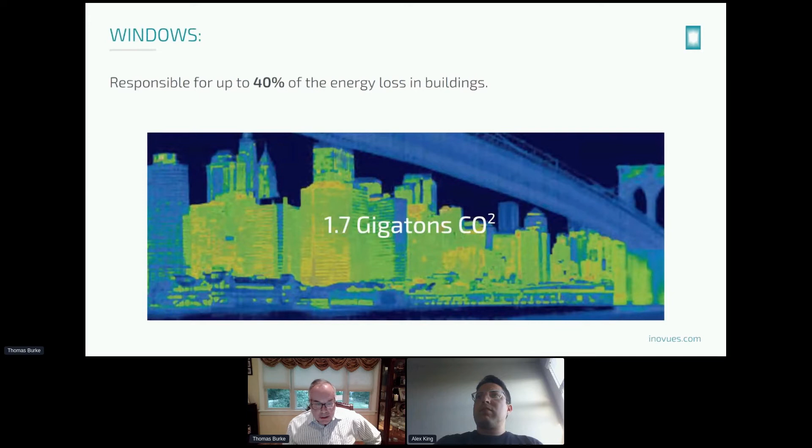Just a brief lesson regarding the size of the problem we're solving: windows are responsible for 40% of the energy loss in buildings. If we were to upgrade 7 billion square feet of windows, that would equate to 700 trillion BTUs of savings, roughly $260 billion in real dollars saved. That equates to 1.7 gigatons of CO2—that's really the size of Russia as a country, just to give you the size of the problem and our solution in the marketplace.

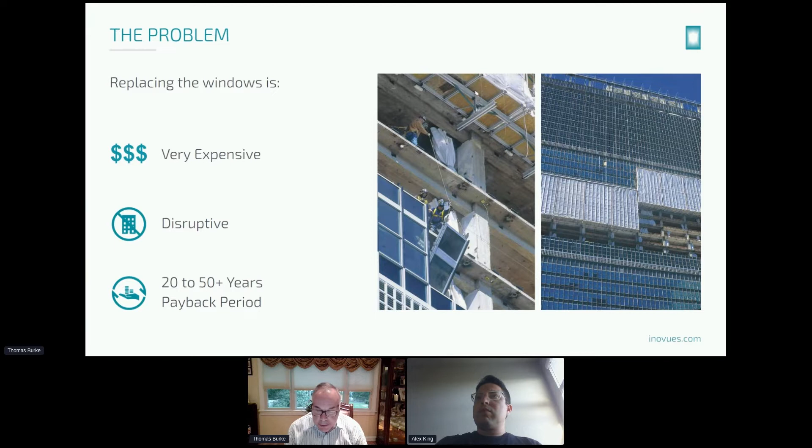So the problem—on the right-hand side you can see a picture of what a facade replacement would look like. This is why a lot of commercial building owners do not do full facade replacements: they're very disruptive, they're expensive, and you look at roughly 20 to 50 year payback periods. But I'd even say that's kind, because it's really almost a 99-year payback, since you're losing—in this case, this size building is probably losing what I'd call a buyout program, so probably 2 years' worth of rent, because they had to buy their tenants out of the building. So that's the problem in the marketplace with a full facade replacement.

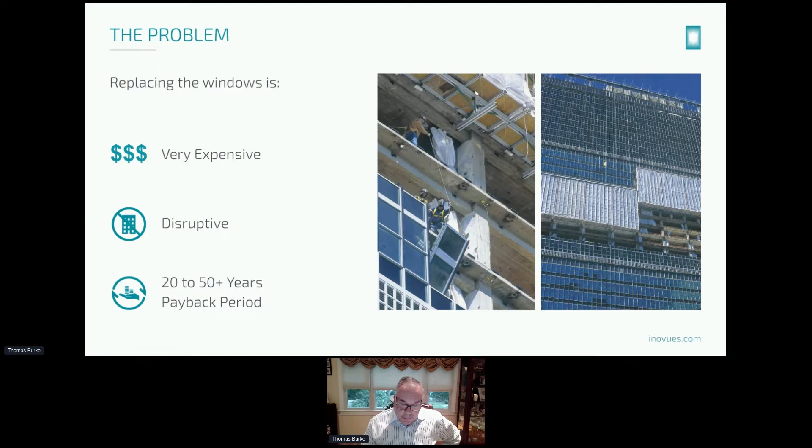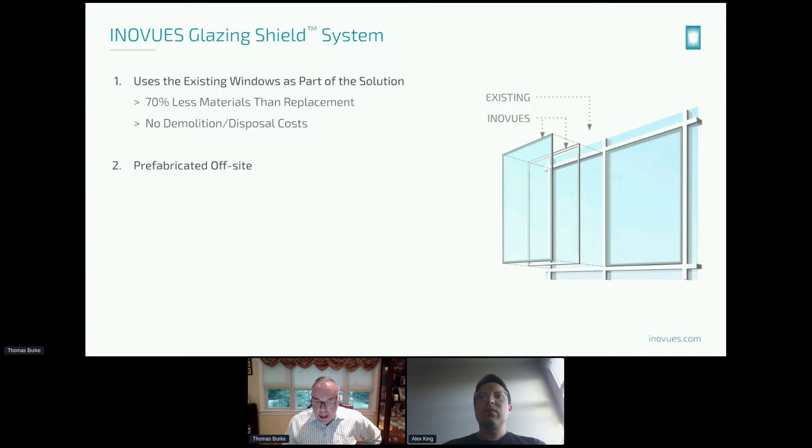Hence we enter the market with our INOVUES glazing shield system. We use the existing windows on the building as part of the solution, so it requires 70% less material than replacement. There's no demolition or disposal costs. Everything is prefabricated off-site, everything's pre-measured on-site. It's a quick and easy installation, and it can be installed either on the outside or the inside of the existing window. It's the only glass-on-glass retrofit option in the market today, so we cut installation costs by up to 80%. It's an overglazed system, so it doesn't require any removing, replacing, drilling, or altering—there's no disruption or loss of income, as I showed in the previous slide.

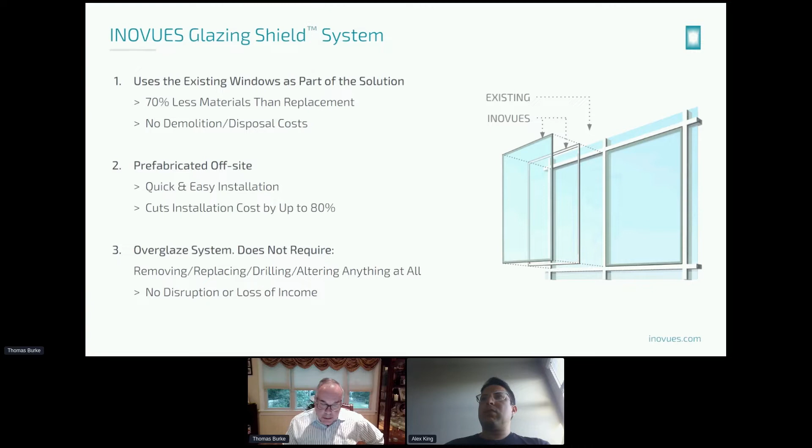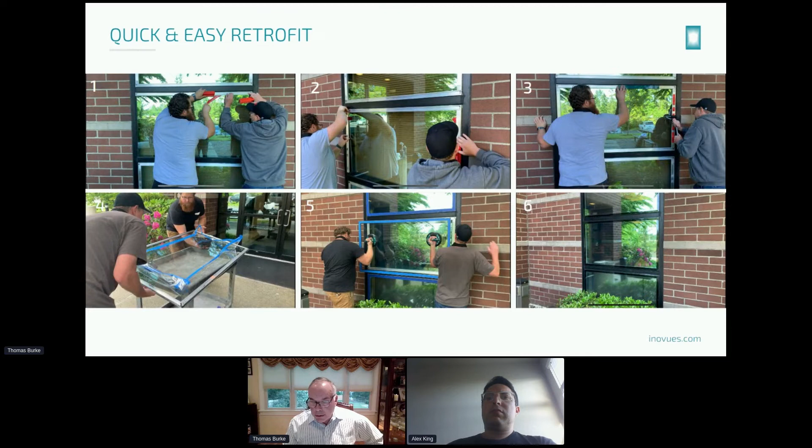This is a step-by-step of an installation we did with a single pane window, showing how quick and easy it is. In step one, the window is pre-measured and everything is prefabricated off-site. The window is cleaned, and we apply an architectural structural glazing material to the window, then a spacer frame system is put around the perimeter of the existing window. In step three, we take a J-bar and apply slight pressure all around the perimeter to make sure the system is adhered to the existing window, then the prefabricated unitized panel is lifted into place. It has a mating system already adhered to the pre-measured panel. Using a 3-axis movement, it's locked into place, and then we put a perimeter sealant around the window. Roughly, in this case, it took about 20 minutes to do one window—quick, easy, no material left on site for waste.

So this is a before and after slide, just to give you more of a pictorial of a single pane window, the anatomy of a single pane window with original glass. The interior in this case was 70 degrees, the exterior 0, and then after we took that single pane window and turned it into a double pane window, we're providing up to 10 times the higher thermal insulation value. The desiccated air gap from the inside of the existing window to the outside of the new glass is about 1.5 inches.

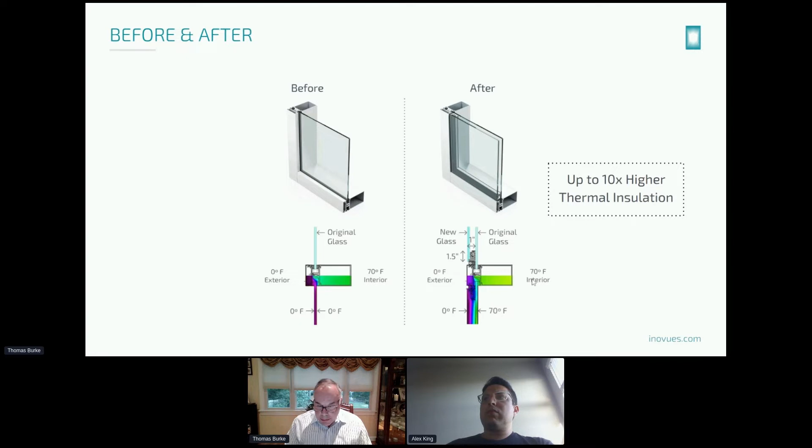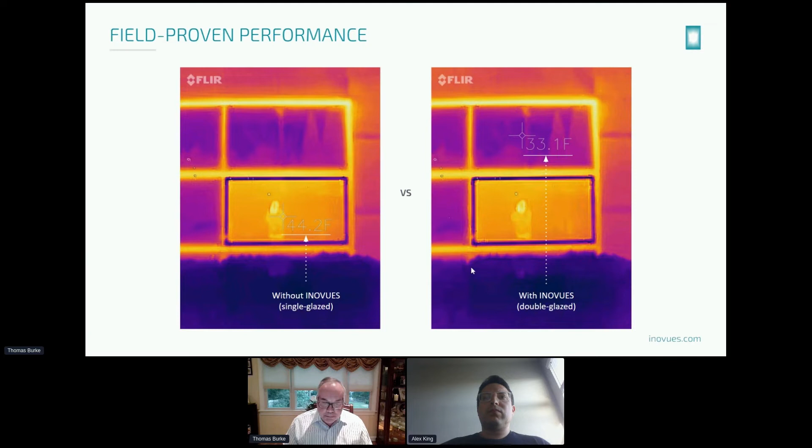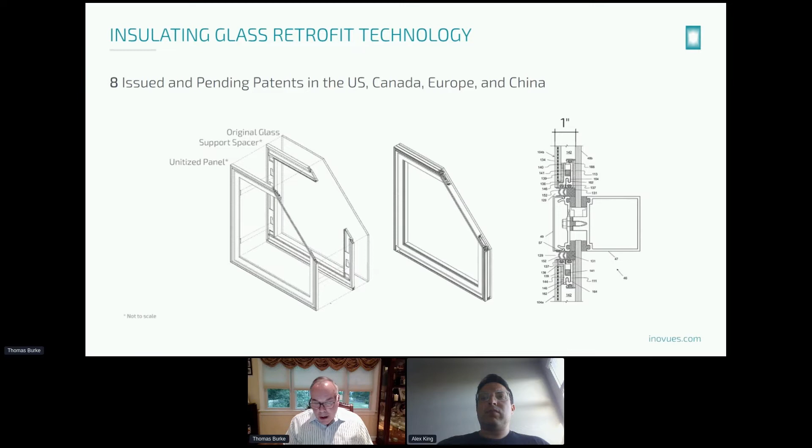Roughly the amount of weight we're putting onto the existing window is less than 3.5 pounds per square foot. The perimeter of the existing window is what actually holds the weight of the new panel.

We did independent tests to find out how our window would perform. One of my favorite parts of our testing methodology was when we took a wind turbine, put it on a skid steer, and ramped it up to roughly 145 miles an hour, testing this existing window with our mated INOVUES system for high wind resistance and air leakage. We outperformed the tests, so again, stringent testing on the INOVUES technology system.

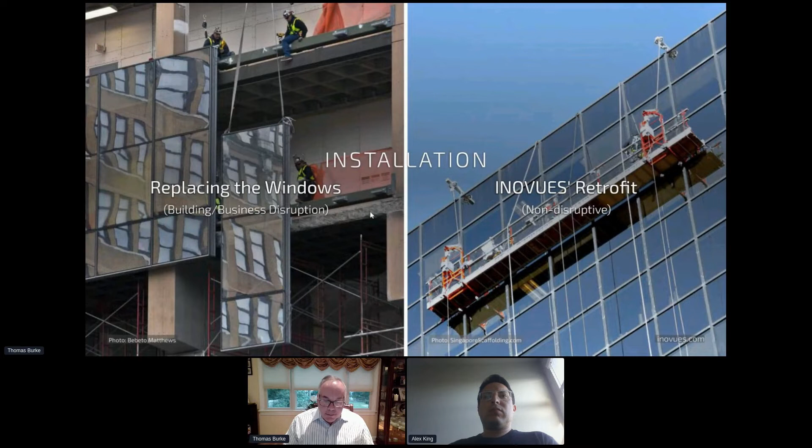From the perspective of replacement versus retrofit, we could take a swing stage on an existing high-rise building and use it to install our system on the outside versus, on the left-hand side, a replacement system which would necessitate major construction. So the ease of installation on a high-rise building is very non-disruptive.

So the appearance of retrofitting an existing building is quite non-disruptive, and the line of sight from the existing window to the retrofitted window is the same.

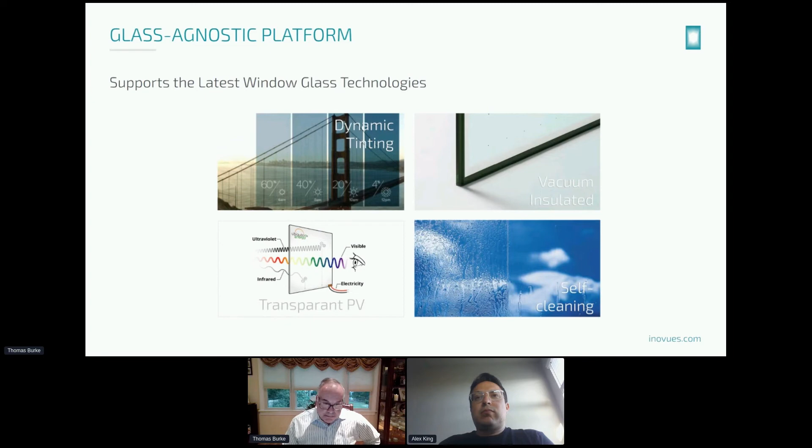This is a video which shows dynamic glass in action.

What you could see here is the sun dictates how much tint is used when dynamic glass is in action. This allows for some infrared, some sun, as it deems possible, which allows for less or more thermal comfort within a building.

Our technology works with most windows and curtain walls. We can be applied either externally or internally as a retrofit. With building owners, it could be a myriad of different things as to why they would purchase us. It could allow for downsizing of HVAC equipment, or it could be purely an energy play. In apartment complexes, we've seen noise reduction be a driver in the marketplace.

It extends the life of the existing window for up to 25 years. We look at insulation, obviously, on the energy side as being a peak driver in demand in the marketplace. And with schools, we've seen the addition of safety and security by putting another pane of glass on the window.

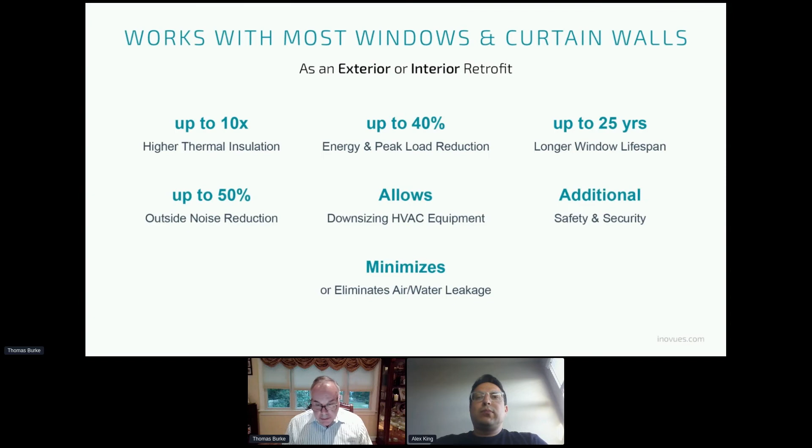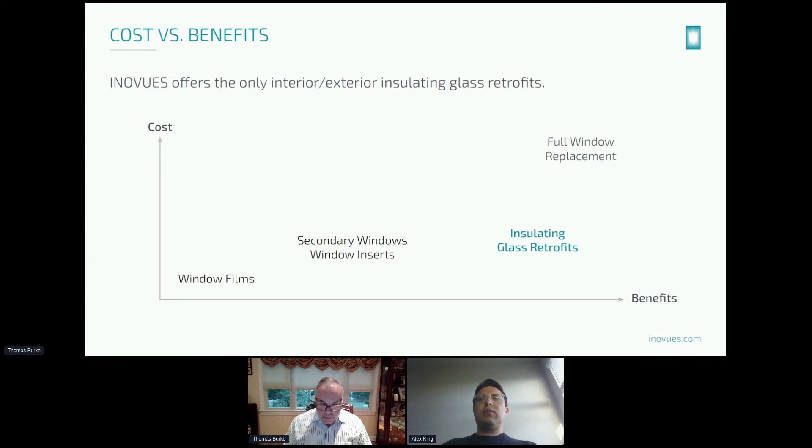To look at the benefits in a nutshell, building owners can seek potentially higher occupancy, longer lifespans for the existing building, lower costs, obviously, than a window replacement, and potentially garner higher rents. We offer a complete turnkey solution direct to building owners, one-stop shopping. We also have easy financing options.

We're seeing in the marketplaces today, such as what's happening here in New York City, Local Law 97 driving our solution because it's the mitigation of greenhouse gases as well as the mitigation of the penalty that building owners potentially may have to pay due to the greenhouse gas emissions.

Sustainability is part of our core technology and business. We present a preservation method, an eco-friendly product, low impact on installation. We're a capital resource intensive business model also, so we run on a very thin budget as well as margin, but we have a high income, economic, environmental, and social value.

Here's four examples of what a retrofit would look like in New York City, specific to an INOVUES adopted solution versus a replacement. Here, 375 Park and 390 Park are two single pane window buildings.

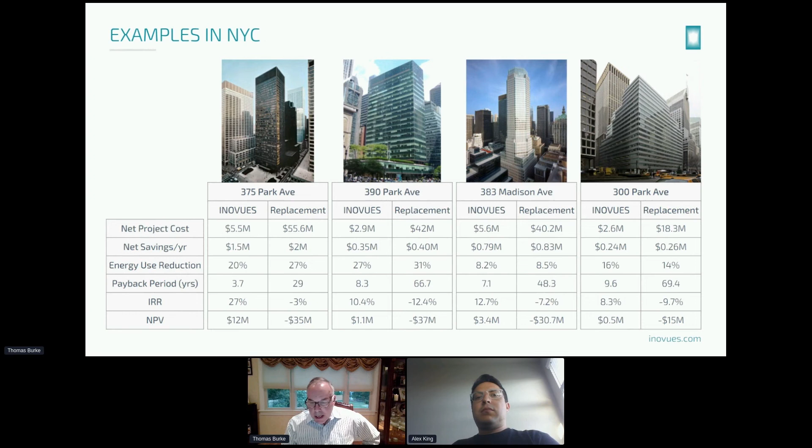So I wanted to thank you. I kind of went through this kind of fast, but I'd like to take questions if there are some questions regarding my presentation, and thank you for your time.